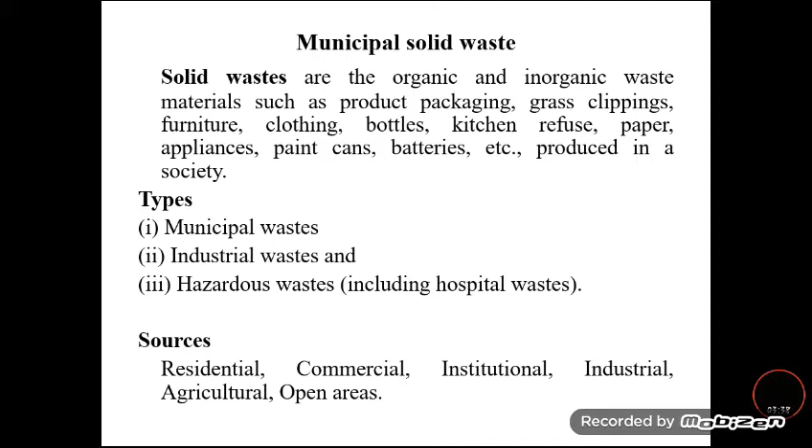And the last one is open areas. The thing discarded in open areas includes cutting of branches, falling of trees, large debris, and dead animals found in sites and alleys of open areas, and solid waste identified from the playground and lawn. These are the types of solid waste according to its sources.

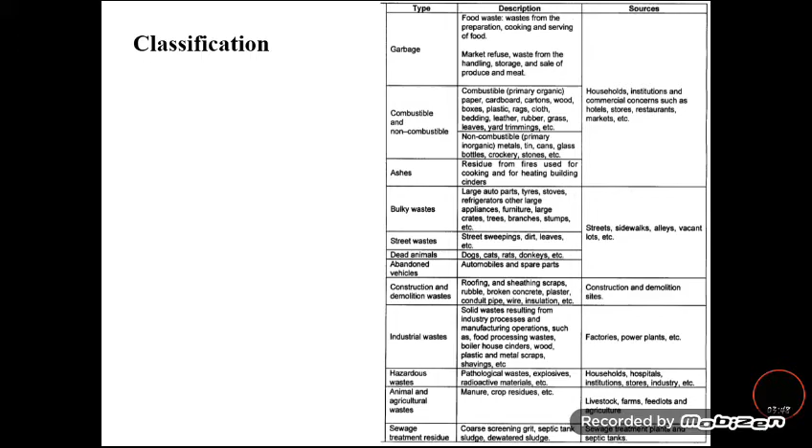Next is the classification of solid waste based on its physical, chemical, and biological characteristics. Based on this, we classify the solid waste as combustible, non-combustible, biodegradable, degradable, and based on its content and characteristics, we classify it as follows.

First one is garbage. Garbage is the waste we get from sale of meat and food waste. Mainly it contains food waste, because of the preparation, cooking, and serving of food in both municipal, commercial, and institutional activities. For example, we cook food at home, in hotels, and whatever is left from institutions also. So the sources of garbage are households, institutions, commercial, and residential areas.

Next one is combustible and non-combustible waste. Combustible means it is easily ignited, mostly dry waste. Garbage is a wet one; the combustible waste is a dry one. It contains paper, cardboard, wood boxes, plastic rags, normally left over from residential, commercial, and institutional activities. Non-combustible waste cannot be ignited, and it is recovered and reused—things like metals, tin cans, glass bottles, and stones, etc.

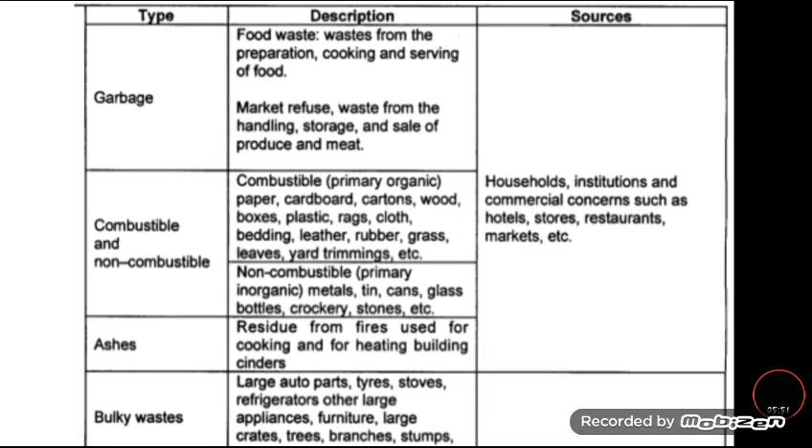Next one is ashes—residues collected from fires used for cooking and for heating buildings. These garbages, combustible and non-combustible waste, and ashes mainly come from institutional, residential, and commercial activities.

Next one is bulky waste. Bulky waste is very bigger in size, that is larger in size—leftover refrigerators, dry washers, and washing machines. These are bulky waste thrown outside as unwanted, like used furniture and big trees and branches of big trees, which are considered bulky waste.

And the next one is street waste. It's produced by means of street sweeping and cleaning of large areas of streets, and it contains leaves, dirt, small branches, and leftover things.

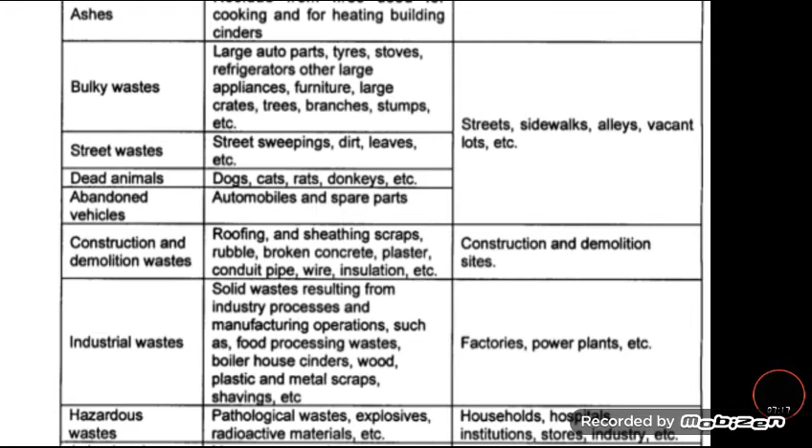Next one is dead animals - the animals roaming in and around houses, areas and roads, which may meet with accidents. These dead animals are also solid waste. Then abandoned vehicles, that is unused automobiles and their spare parts, are considered in this category. The sources of bulky waste, street waste, dead animals and abandoned vehicles are mostly the streets, sidewalks and alleys of open areas.

Next one is construction and demolition waste. It's produced by the actions of constructing a new house, during its maintenance, or while demolishing the whole building for new construction. So construction and demolition sites are the sources for this type of waste.

Next one is industrial waste. As we discussed earlier, the main sources of this type of waste are factories and power plants, from large scale to small scale industries. This waste arises by means of the actions and processes used in the industries.

Next one is hazardous waste. It contains radioactive material, metals, and explosives, that is easily burnt material, and pathological waste. Pathological waste means biomedical waste which contains harmful bacteria, and it arises by means of hospitals. Sometimes municipal waste also produces hazardous waste, like what we use for batteries, and electronic waste may also impart hazardous waste.

Next one is animal and agricultural waste. It is by means of agricultural actions, that is the waste which is discarded from livestock farms and agricultural activities. Last one is sewage treatment residue.

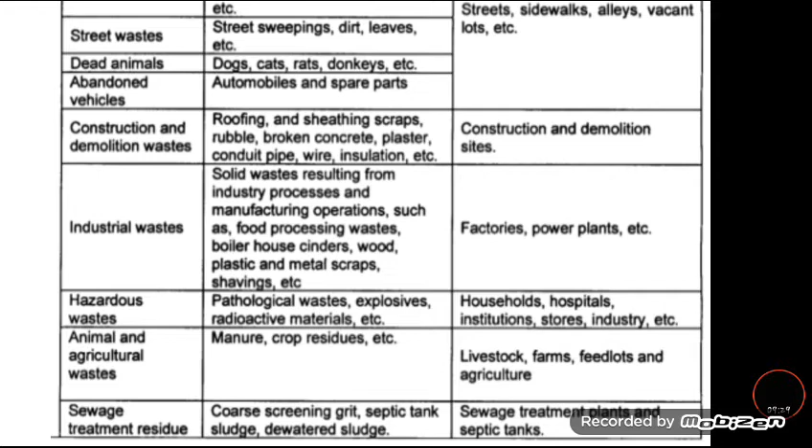This arises from the sewage treatment plant and septic tank of a town. It may contain normally the product which we receive from the screening action - floatable materials which are screened. It is discarded as solid waste, and in the septic tank the sludge which is desludged yearly is also considered as waste under this category.

Next one is characteristics of the municipal solid waste. It's majorly divided into physical properties and chemical properties. The physical properties are normally density, ignitability, corrosivity and explosivity, reactivity and toxicity of the solid waste. Next one is chemical properties.

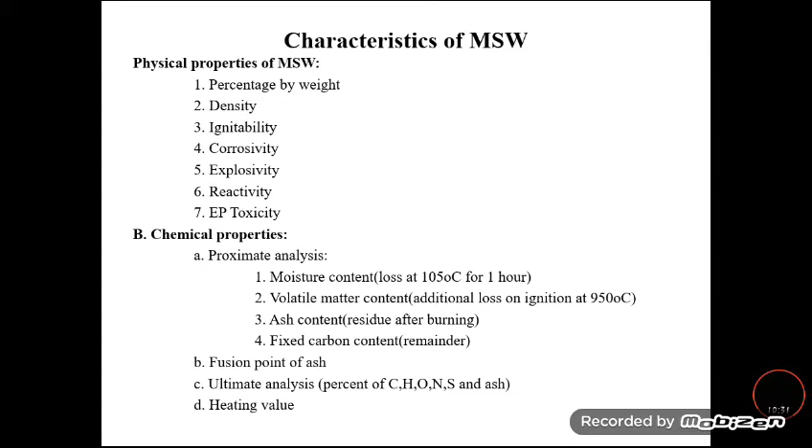In chemical properties, the proportions of the solid waste are determined by means of proximate analysis and ultimate analysis, and mainly the heating value of the solid waste can be categorized under chemical properties. These are the average values of the components determined by using proximate analysis, and these are the values of elements present in the solid waste determined by ultimate analysis of municipal solid waste - this is the average value which is given.

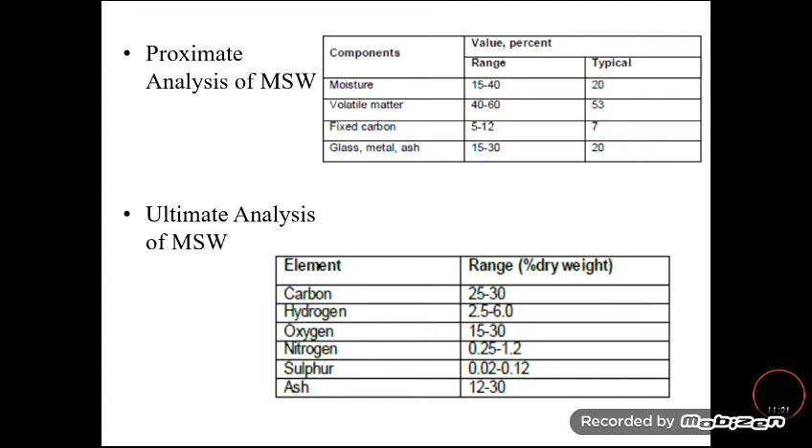Next one is the composition of the municipal solid waste. Normally the municipal solid waste contains a maximum of these types of waste, and the percentage mass, percentage moisture content, and density of those particular components of municipal solid waste have been determined. The range should be as tabulated below.

While calculating the energy content, because each solid waste contains energy, you make use of these values - the range of the tabulated values has been used, because the range indicated in the tabulation may vary from lower to higher level.

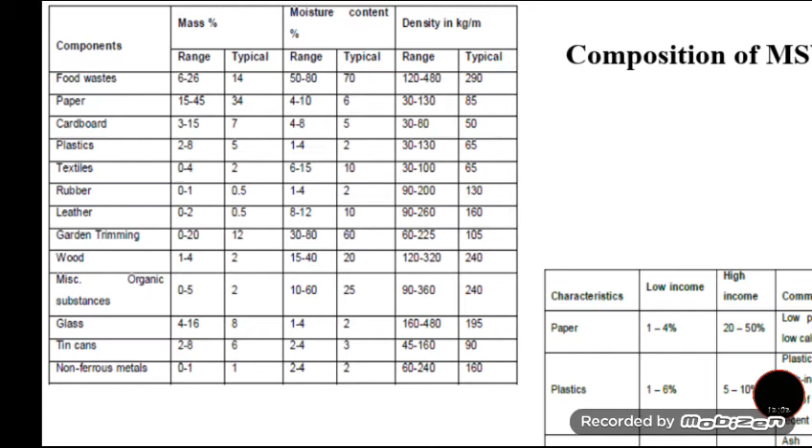So these are also the characteristics. Based on its composition, the characteristics of the municipal solid waste like paper and plastic may vary by means of human actions and animal activities. For example, if our income is more, then the discarded amount of solid waste is also more - income is the main criteria which decides the quantity of municipal solid waste produced. According to this, the values of paper, plastics, ashes, moisture content and bulk density of municipal solid waste have been arrived at.

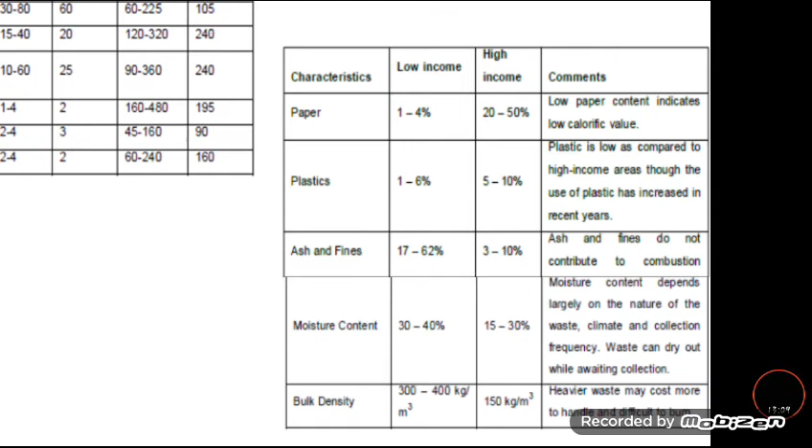These values, the ranges of these characteristics, can be used for calculation purposes. These are the formulas used to calculate the energy content of the solid waste - the total energy divided by the total mass is called the energy content as it is discarded. The density can be calculated by dividing the value of mass.

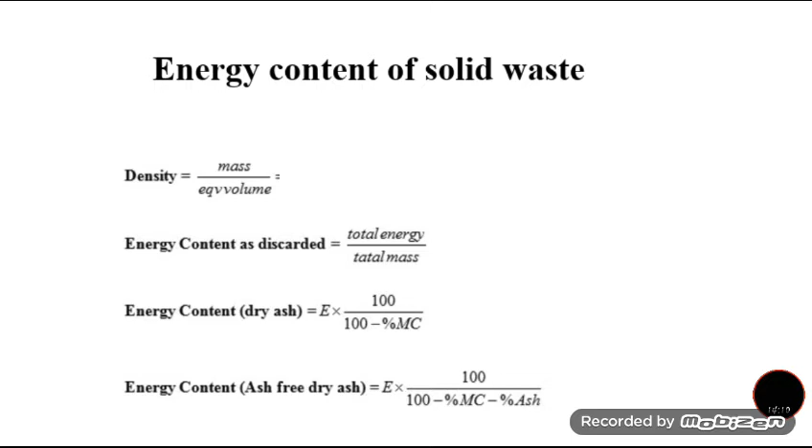The ratio of mass and volume gives the value of density, and the energy content in dry basis is calculated by multiplying the energy content as discarded by 100 minus percentage of moisture content. So we have to detect the value of moisture content to get the energy content in dry basis. The energy content in ash-free dry basis is calculated by deducting the percentage moisture content, and in addition, deducting the percentage of ash content.

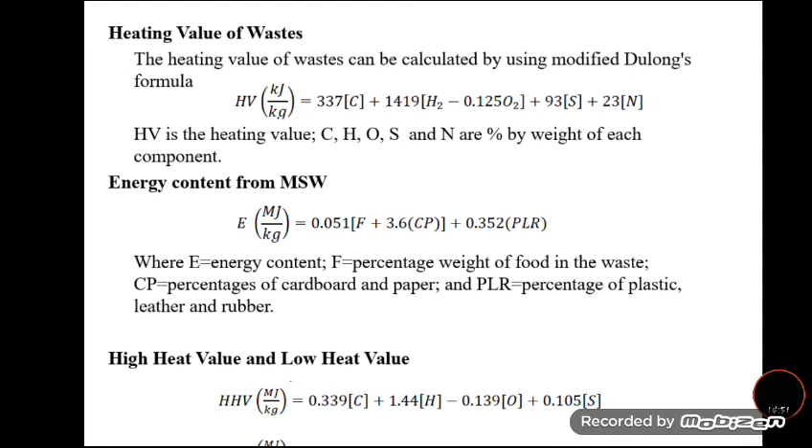Next is heating value, which gives the quality of the municipal solid waste. The heating value of the waste is calculated using Dulong's formula in terms of kilojoule per kg. If we know the values of carbon, hydrogen, oxygen by percentage weight, we can use Dulong's formula to calculate the heating value, and the energy content of the municipal solid waste can also be determined using this formula if we know the percentage composition.

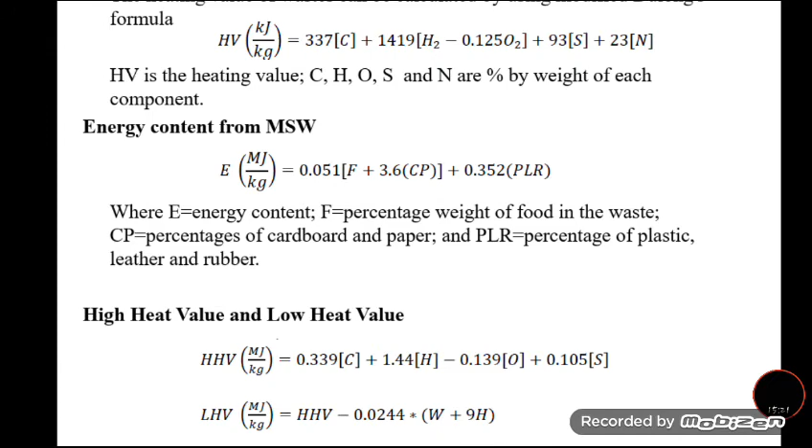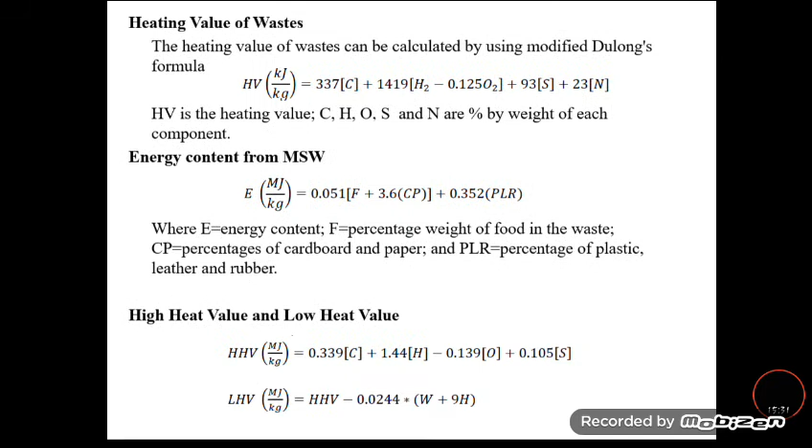There are parameters like food, cardboard and paper, and plastic, leather and rubber, which make up the maximum quantity of solid waste. If we know these values in percentage, we can calculate the energy content using this formula. The high heating value and low heating value are arrived at using these formulas, if we know the values of carbon, hydrogen, and oxygen in percentage by weight.

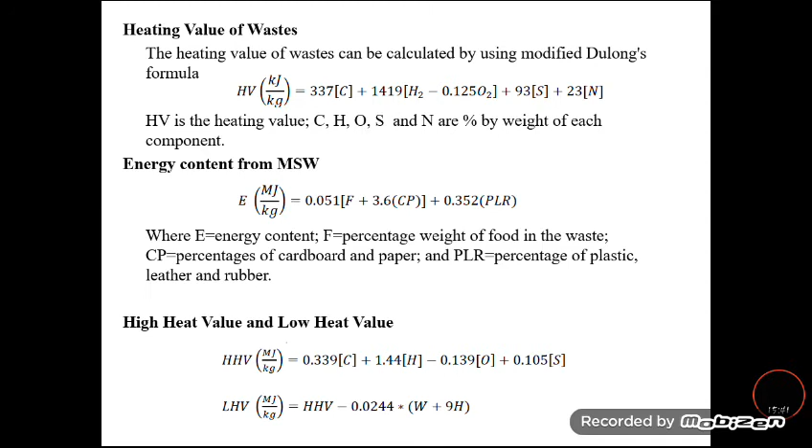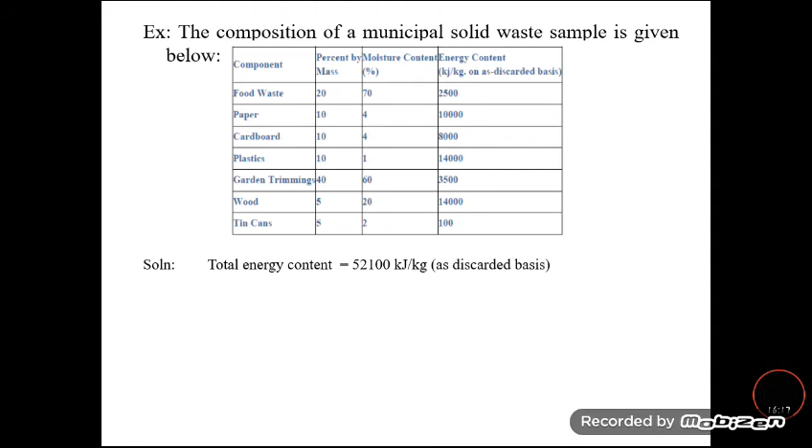There is a solved problem for the composition of municipal solid waste. Here the total energy content in terms of discarded basis is given for various components of the solid waste. The percentage by mass is also given, and the moisture content of each component is also given. We have to add all the energy content.

Next is the dry mass. To calculate the dry mass, we deduct the value of moisture content in terms of percentage, as given in the tabulation. So the percentage moisture content of the solid waste is deducted from the mass of the solid waste, which gives the value of dry mass for each and every component.

Next, the energy content: the total dry mass has been added together for each component of the solid waste. By adding these values, we get 61, and the moisture content is calculated as 100 minus the total amount of dry mass, divided by 100, which gives the value of moisture content. Then the energy content on dry basis is calculated using the formula: energy content as discarded basis multiplied by 100, divided by 100 minus percentage of moisture content. By substituting the values, we get the energy content in dry basis.

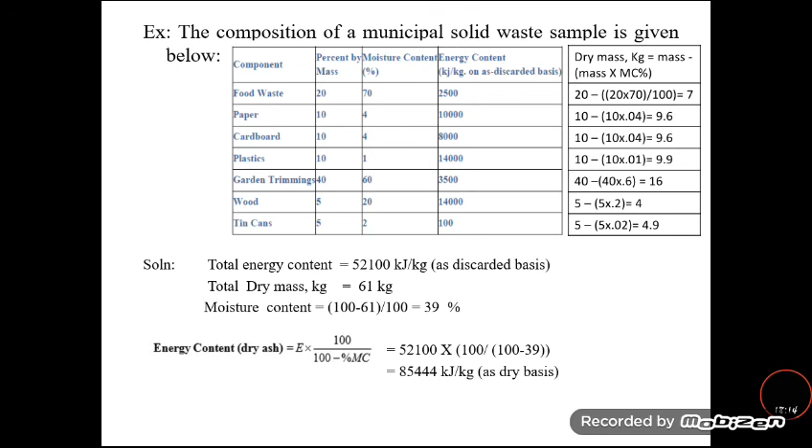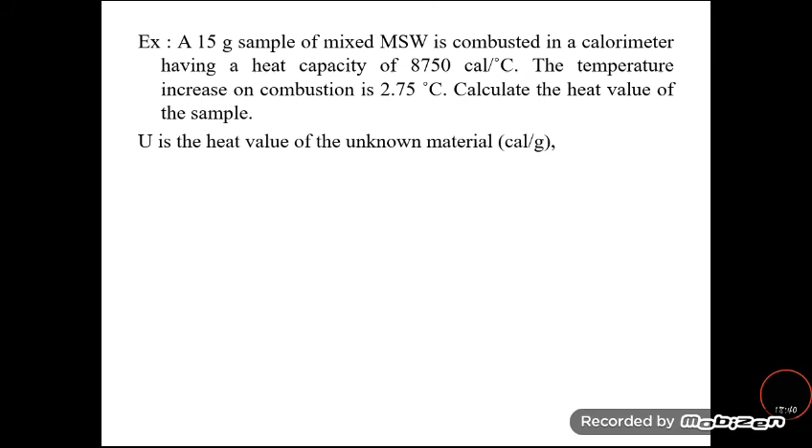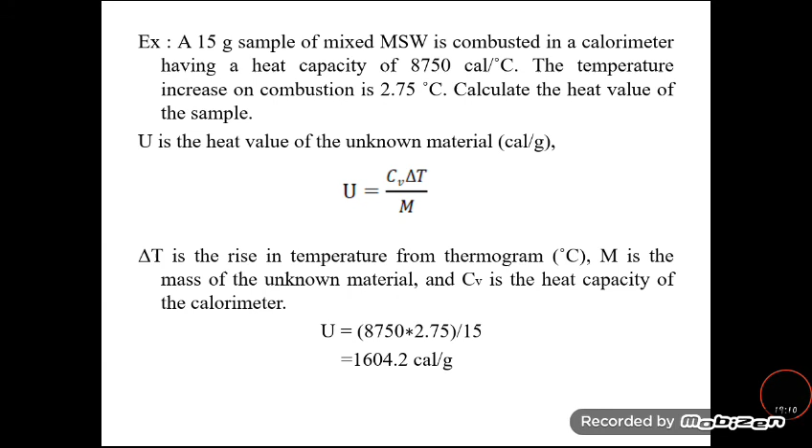The next solved example: 15 grams of sample is given, and the calorimetric heat capacity is given in calorie per degree Celsius, along with the temperature increase during combustion. We are asked to calculate the heating value of the sample, determined using the formula C into delta T divided by M. Here delta T is the rise in temperature, M is the mass of the sample, and C is the heat capacity of the calorimeter. By substituting the known values given in the problem, we calculate the heat value of the unknown material as 1604.2 calorie per gram.

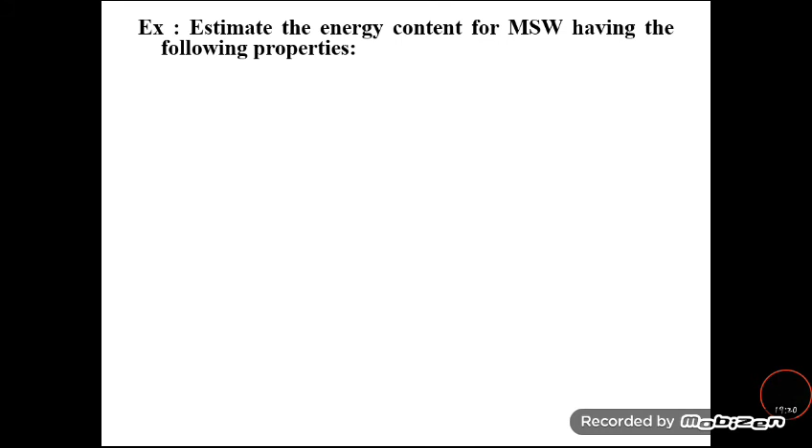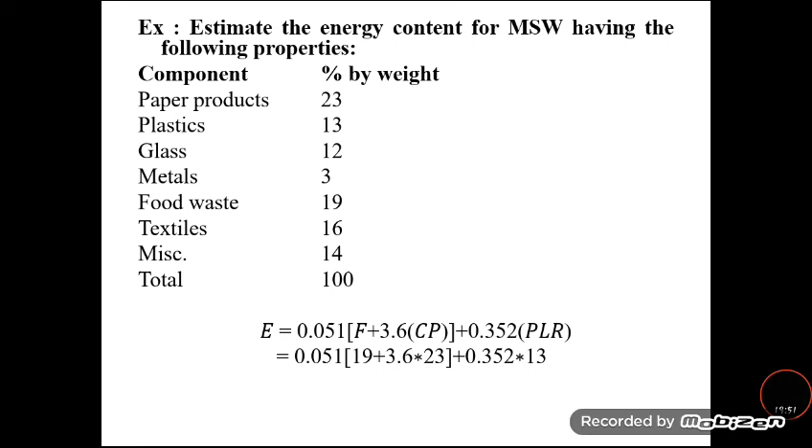The next solved problem: we calculate the energy content of municipal solid waste for given properties, expressed in percentage by weight for the following components. We already know the formula for the energy content. If the values of food products and plastic, leather, rubber are given in percentage by weight, we substitute these values to calculate the energy content of the solid waste.

Here F means the value of food waste, which is 19 percent, and CP is the value of paper products, and PLR indicates the percentage weight of plastics, leather, and rubber, which is given as 13. By substituting these values, we get the energy content of the municipal solid waste as 9.77 per kg.